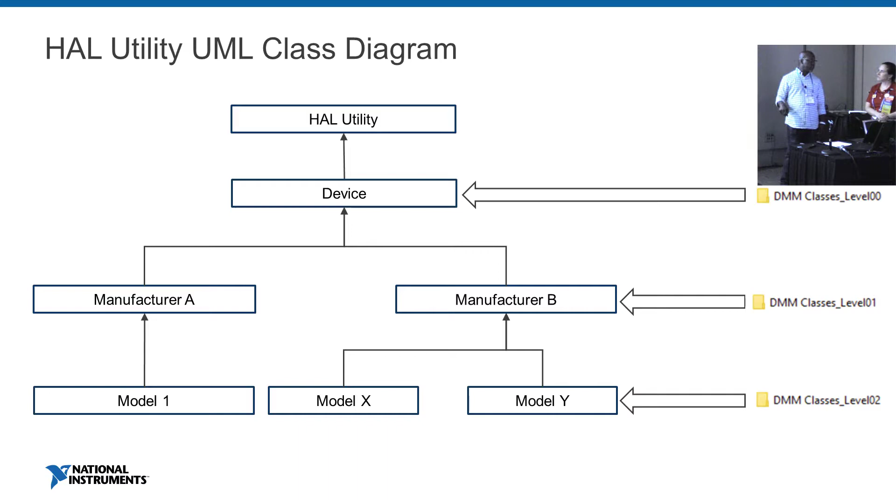So this is a DMM class using that exact model. So here's our HAL utility. Here's the DMM parent class, and these are all the methods that can be called using this parent class.

And you notice we have a file level, so we call it DMM class level 0, level 1, level 2. So level 0 is the parent class. Level 1 is the device manufacturer class. And then level 2 is the actual instrument itself.

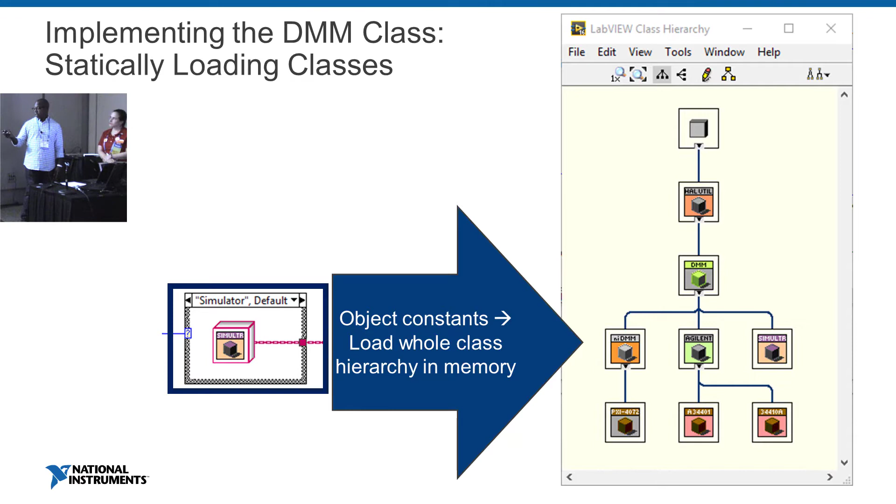So this is an example of us implementing a class, statically loading classes. This is our first attempt. When I looked at this, it had one major drawback. It loaded all the objects. Because as soon as you put one of those objects on the block diagram, it loads everything that's associated with it. And the biggest problem there too is if you go to a test bench that doesn't have that code, then you start getting all sorts of errors.

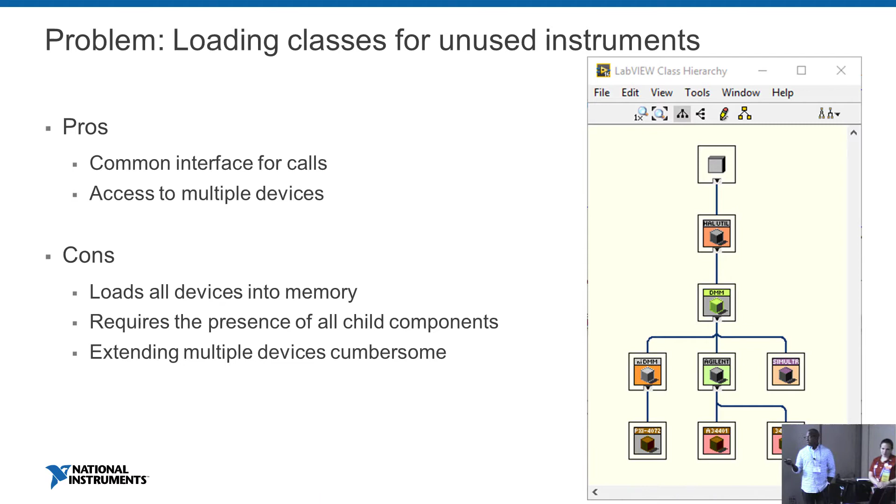So this works, there's pros to it: the common interface for all the calls and access to multiple devices. That was nice. The cons were loading all the devices, it requires the presence of all child components, and extending to multiple devices was still cumbersome. So, this is what we use to resolve that: selectively load instrument classes. This works well.

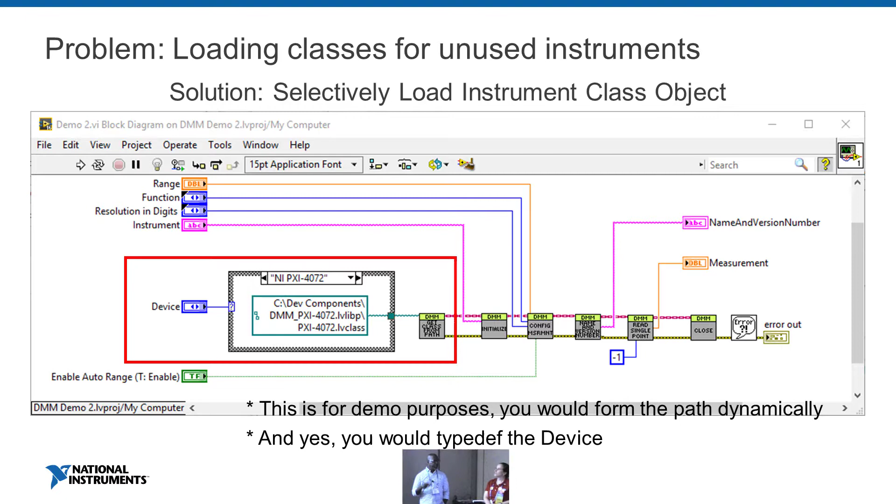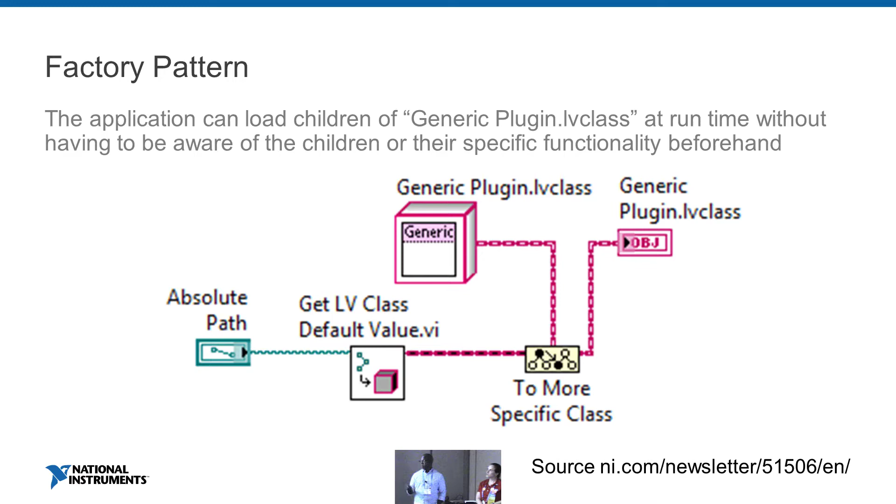So, what we use is the factory pattern. And we use this factory pattern to actually load the class that we want at runtime. This is how we implement it. We have a method called getClassFromPath. In comes the selected path, and out is that generic class that you see here, which is our parent class, cast to that specific class. So, now by using that, we only load what we selected.

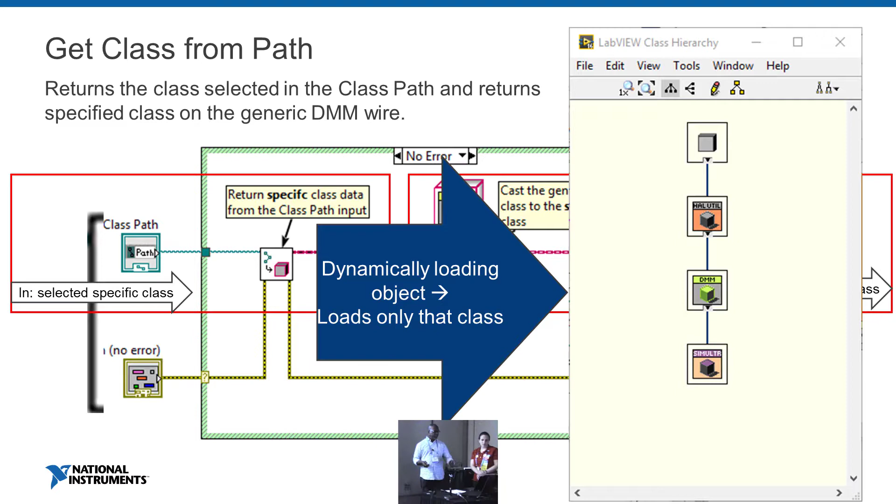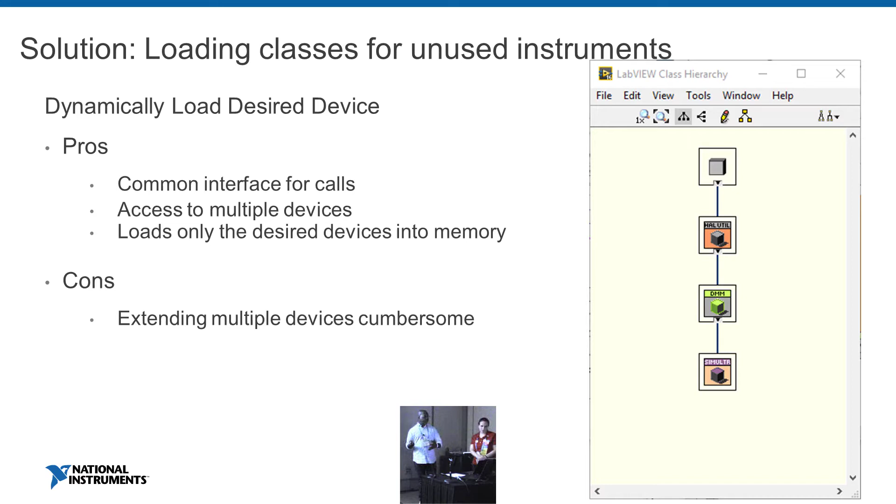So, now looking at this, loading classes for unused instruments, the pros are common interface for calls, access to multiple devices, loads only the desired devices into memory. The cons, still extending it to multiple devices is cumbersome. So this problem we have to overcome now. So solution one was the actor framework. Very steep learning curve, as I mentioned before. Lead architect overload, answering a ton of questions. So that meant Luis and I would be constantly walking guys through this stuff.

The way I heard that story was that you really wanted to use DQMH and Luis was still kind of hesitant, and then he said, which questions do you want to answer? The actor framework questions or the DQMH questions? Okay, DQMH it is. Yeah, because he loved that because he was a software engineer.

And the poor monitoring of actors. If you've ever used actor framework, that was a nightmare. Decoupling. And it's gotten better because members of the community have created tools. There's the actor monitor from MGI that you can use. Sam Taggart created API testers for actor framework, but back then, none of that was there, because we started this journey about 3 years ago.

And so, solution two, Delacor Queued Message Handler. It was easy to learn due to the queued message handler familiarity. Everybody in the group understood that. Plenty of documentation and demo support. The developer experience tools, all the scripting tools, made life a lot easier. And then the excellent TestStand integration. That was one of the winner chicken dinners for me. It really was, because I knew we were moving to TestStand, and I heard another guy, he's in the room right now, screaming at the top of his lungs about certain things. And so this is why I was looking into this.

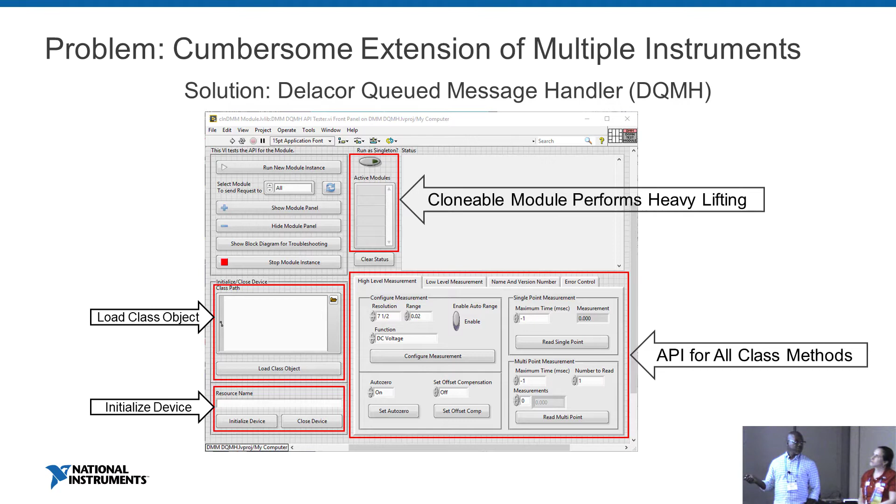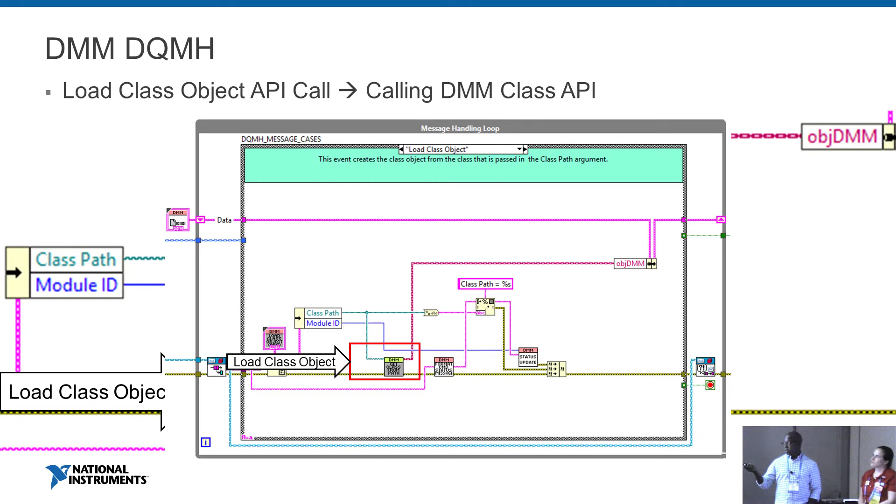So this is the load class object API call, calling a DMM class API. Because in actuality, our DQMH is a wrapper around our class, our DMM. This DMM DQMH is a wrapper around the DMM class itself. So here's the load class object from the DMM class. Here's our initialize device from the same class. And this is our DMM DQMH API itself.

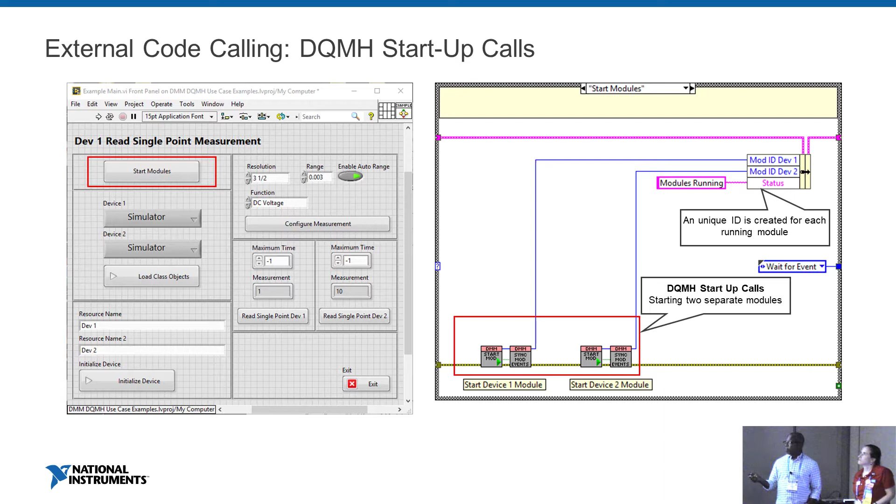So our DQMH, these are DQMH startup calls. Here's an example of a demo that we use where we're making those calls. The start module and the sync events. So we're starting up two devices here, device 1 and device 2. So those are linked to that button. So when that button is called, this event gets fired. Well, there's an event that calls this.

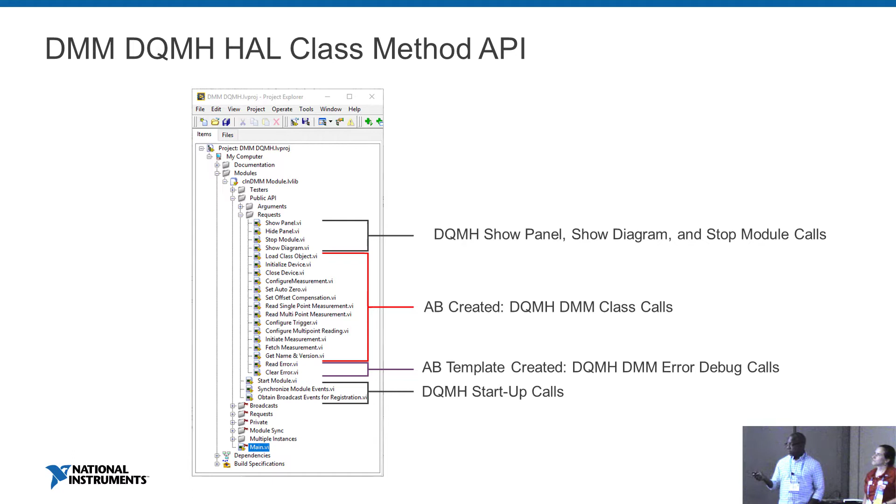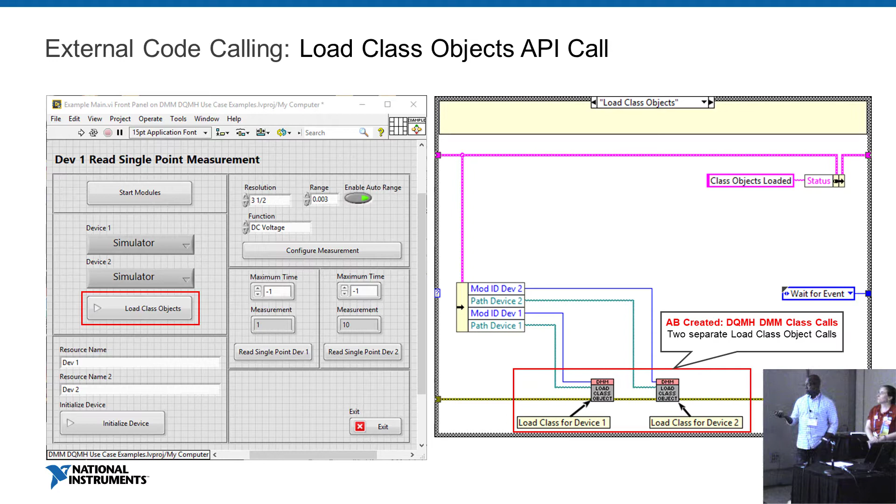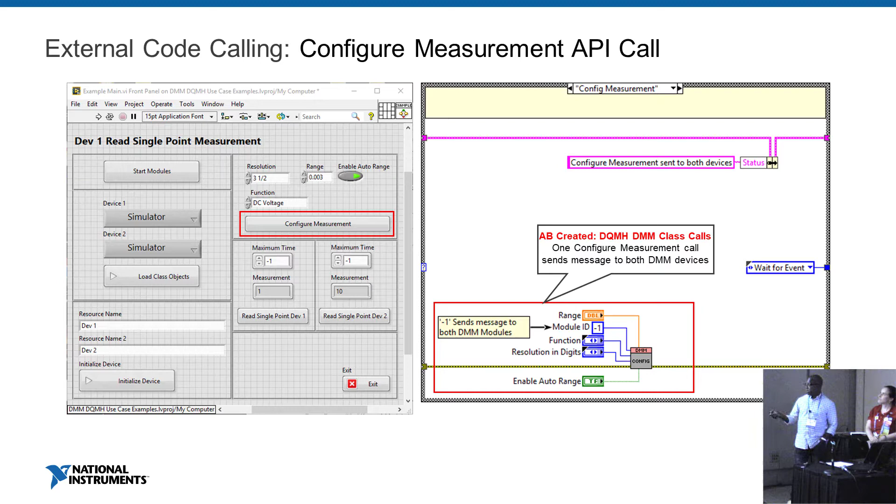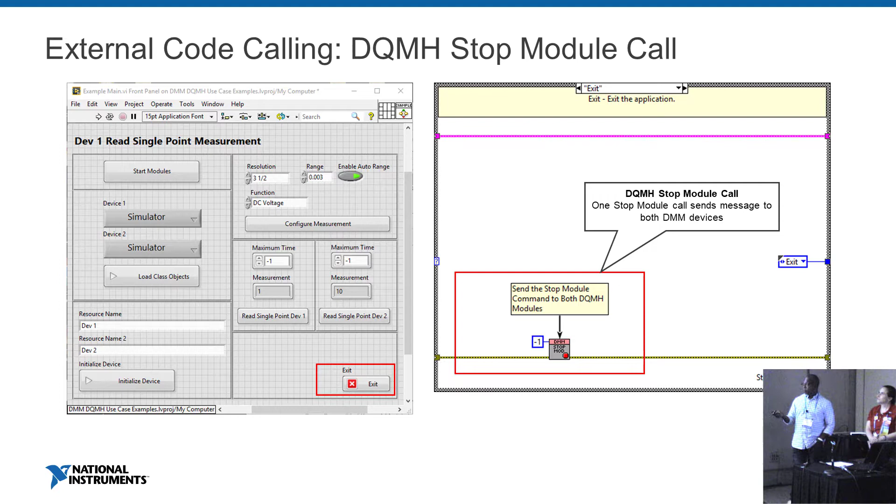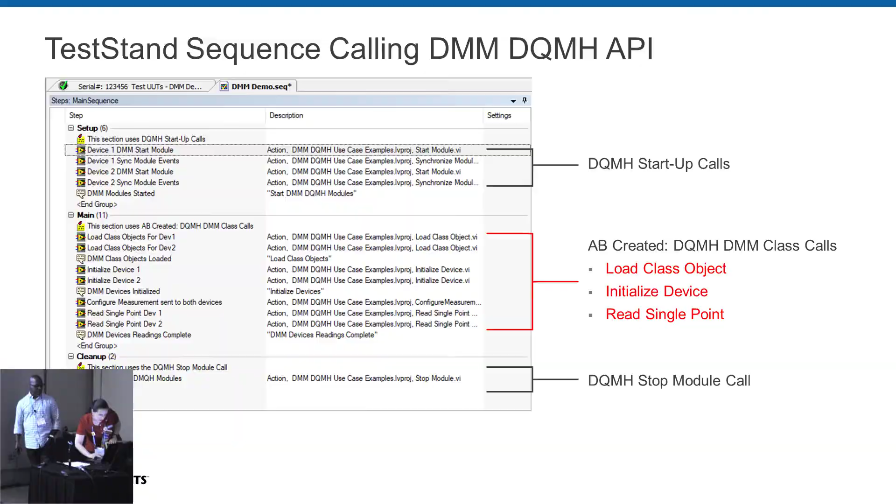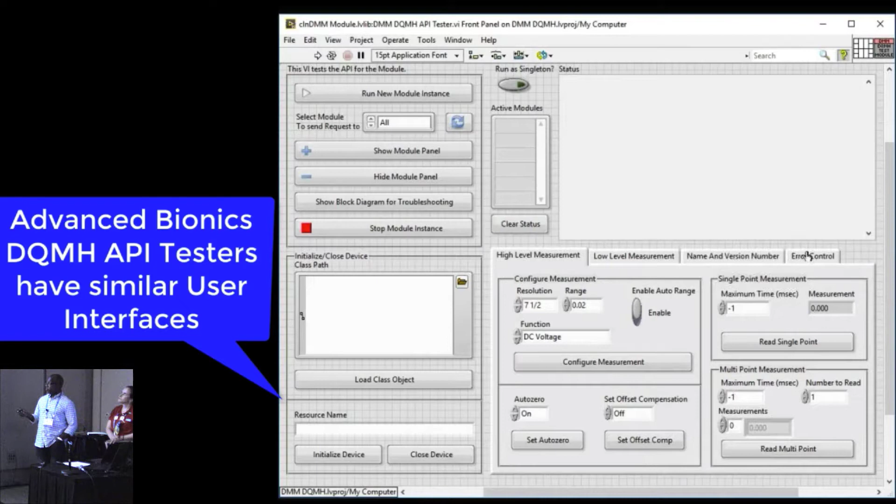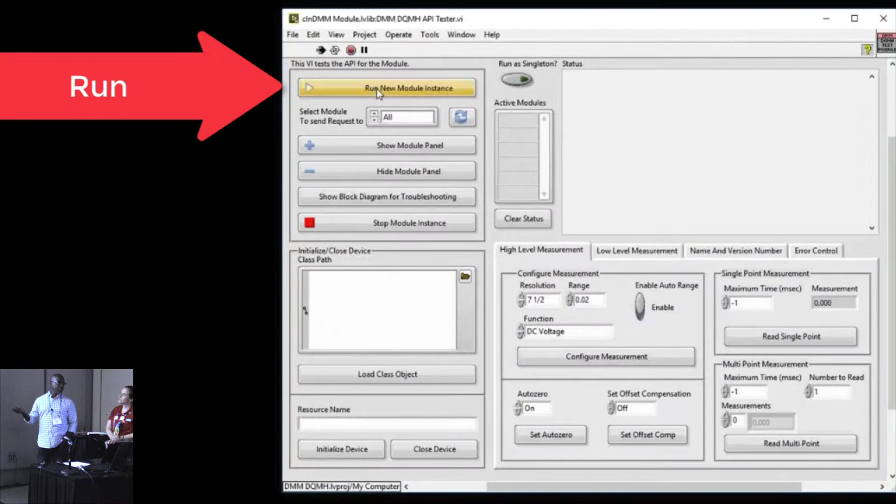Yeah. So this is one of our testers. As I explained to you before, this side right here has to do with initialization and startup of the DQMH and the devices. And all of ours have a similar interface. The UI includes all of the API calls. And if you have a new API, if you added a new method, you add a new call to this tester. So the calls on the left side, I've explained this. Part of this was, we did this because when a new guy came in, he had difficulties using these testers. So we had to make them all the same.

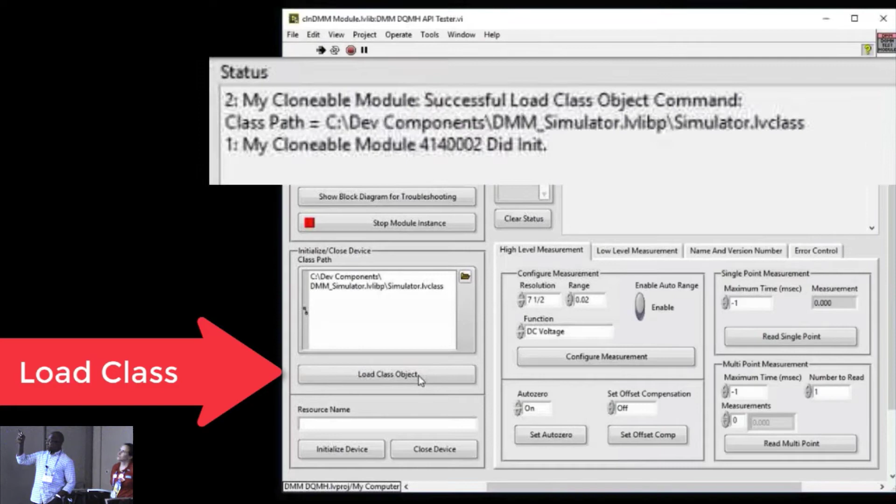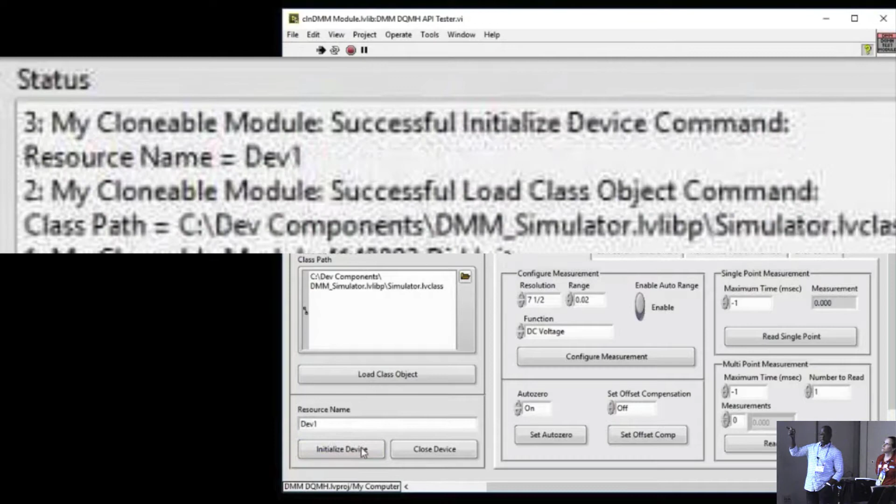So here we're going to select a class. This one we're going to use the simulator. So we load it, and then the message says it loaded successfully. And that's something that we do, because we were doing this for debug, and it became part of all of our APIs now. So now we're going to initialize the device. It'll tell you whether or not it initialized. And so here's our panel. And what we're going to do here is actually change the configure measurement.

So I'm going to send the message. You were asking where Norm was? Norm is next door.

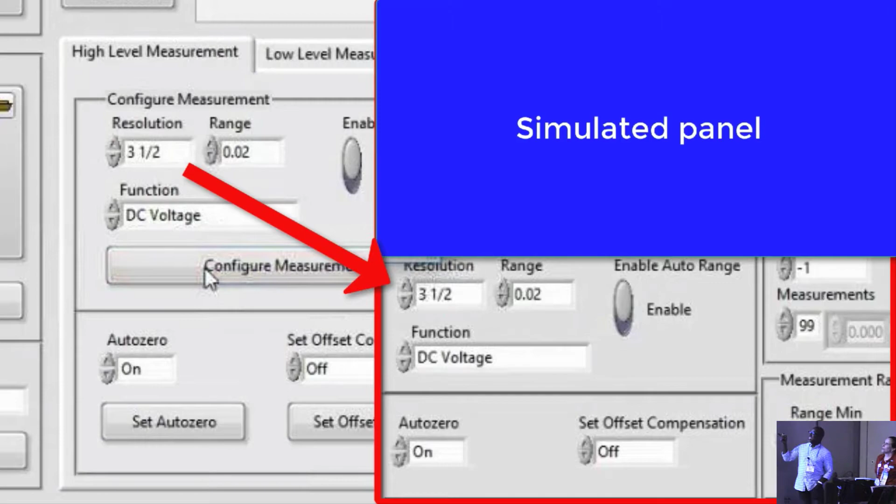And so now we're going to do this with hardware. So in this, I'm going to have two DMMs, an Agilent 34401A and a 34410A. All the way from Los Angeles, you're going to see them in a minute. So we're going to load the 10A class. And there they are.

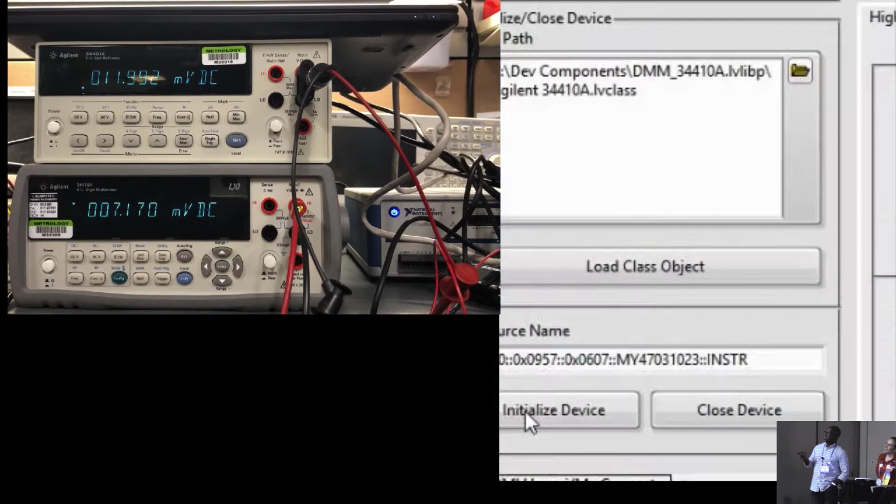And so here, once we initialize the device, we put it in remote. So you'll actually see it go in the remote. And then we're going to do the second one, and we'll do the exact same thing. So here we select the device, because if you do it all, you'll get an error. We load the object. This was a GPIB device, so that's why the resource name looks quite different than the USB device. So now this guy goes in the remote mode.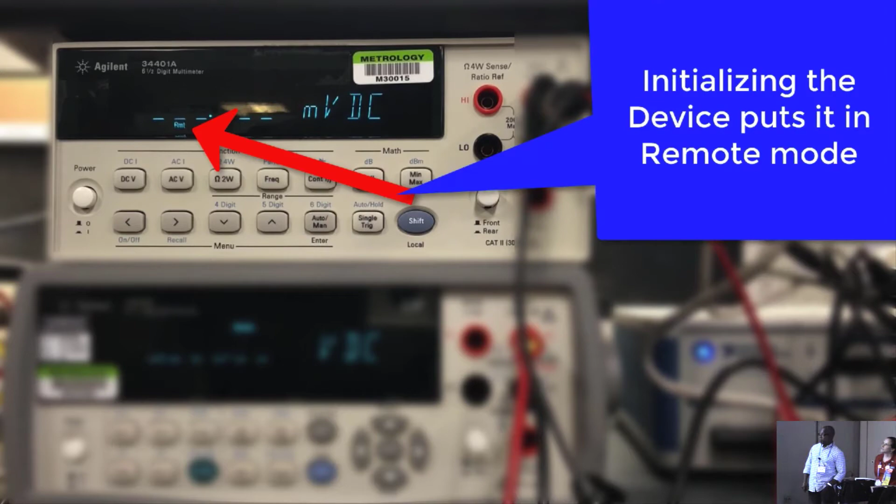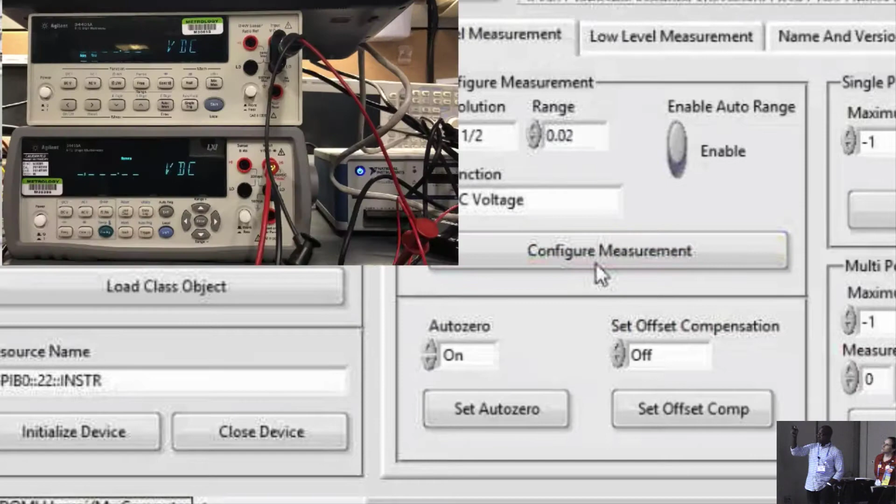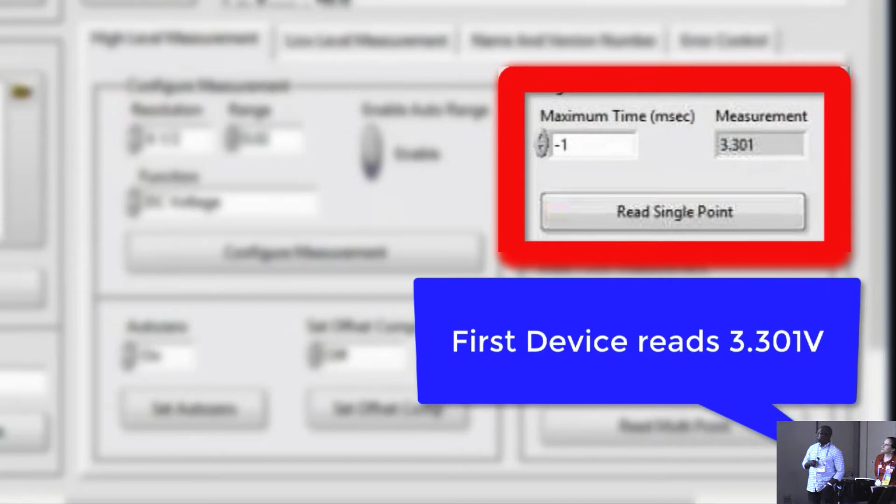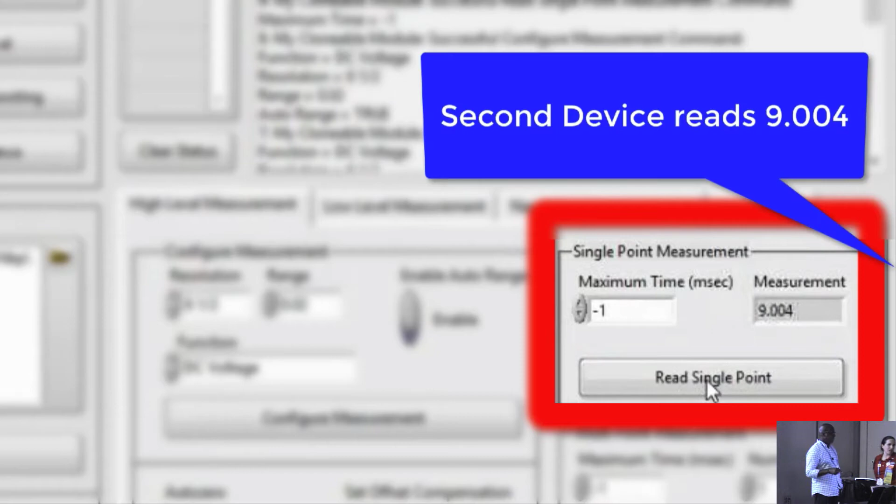Now, here, we're going to change the resolution on both devices with a single call. And so, the decimal points changed when we did that. Now, what we're doing here is I have a power supply. I set one of the devices to read 3.3 volts and the other one to read 9 volts. So we're going to read the first device. It's going to read 3.3, then we're going to switch to the second device. And it's going to read 9 volts. So he used the same API tester for 3 different devices, simulated, and 2 different Agilent boxes.

Any questions so far? Yeah, how many other instruments did you interact with? Sorry, there's a question here first. What was that? How many other instruments did you support? So besides DMM, do you have other classes? So the question he asked is how many instruments that we create these APIs for. I think that's what you're asking.

Yeah. So in our company, we use DMMs, spectrum analyzers, stepper motors, power supplies, signal generators, and we have network analyzers, SMUs, and so we have classes for all those. And even for every device that we get, if it doesn't fall into that class, we create a new HAL for it.

What was the question back there? Have you evaluated the adoption of IVI at the beginning? The question was if you have evaluated the use of IVI from the beginning. No, I did not. Actually, I wasn't even familiar with it, so it didn't cross my mind. What is the advantage of this? The advantage of this over IVI is that IVI was a lovely dream that did not get fulfilled. Not all the companies implemented all the functions the same, and you ended up having to write your own drivers anyway. And you still have those issues here.

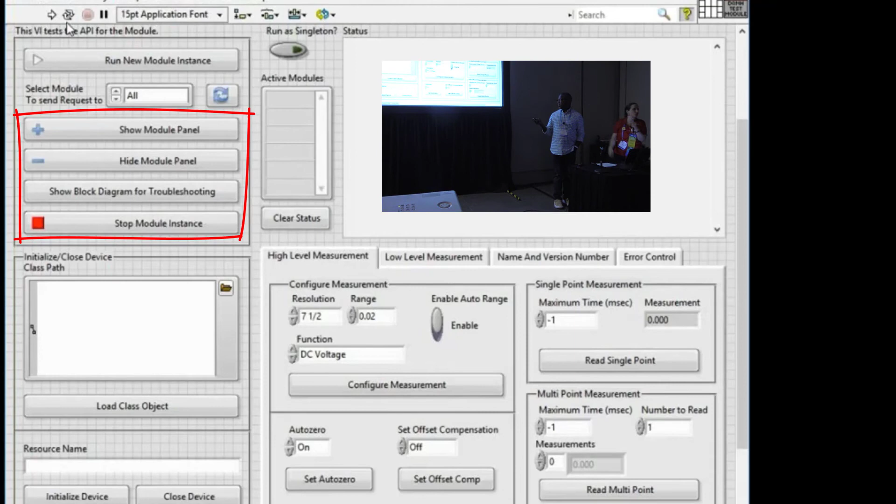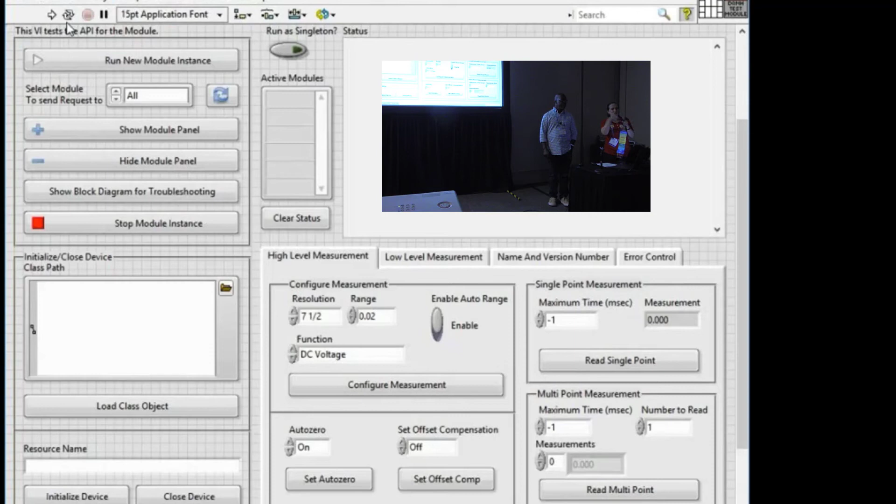So I know this is curious because we use classes to abstract details, right? And you're supposed to be using OOP to do the abstraction. And now we're taking traditional LabVIEW and wrapping the abstraction, so we provide another level of abstraction. The difference is in what it is that we're abstracting. With classes, we're abstracting the fact that I can switch and have any device work the same. With the wrapper on DQMH, what I'm abstracting is the code complexity that might scare some of my developers. It's just a different goal. Does that answer your question?

It seems like you could have measurements at that level. Yeah. You could say, okay, I'm going to put my measurement at the DQMH level, and that kind of is your measurement abstraction. The other customers that I have, that's what they have done: they create the measurement module or the test module, and then they have the DQMH through all the calls, and it's class-based. And this is what I was mentioning earlier.

The reason I liked it when Michael suggested to present this is that because we say that you don't need to understand OO to use DQMH, there's a lot of people that say, oh, but I use OO, so I won't use DQMH. And that's not true. You can insert as much OOP as you want into the DQMH module. And you can create your own templates. So if there are things that you don't like about it, as long as you keep our scripting tags on the naming things, it's going to work.

All right. Any other questions? No? Yeah, how are you keeping track of the active modules that you're getting the VI name from, property node? We are getting the clone name, the clone number. So we're using the clone number because we know that LabVIEW is already making sure that that's unique. All right, any other questions?